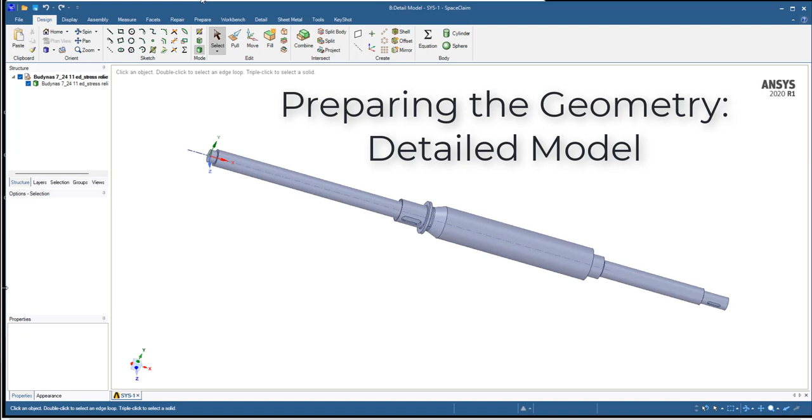In this section, I want to talk about taking our geometry. We've got a detailed model here, and in this case you can see I have implemented two stress relief features, one over here, and then also a smaller one at this step right here.

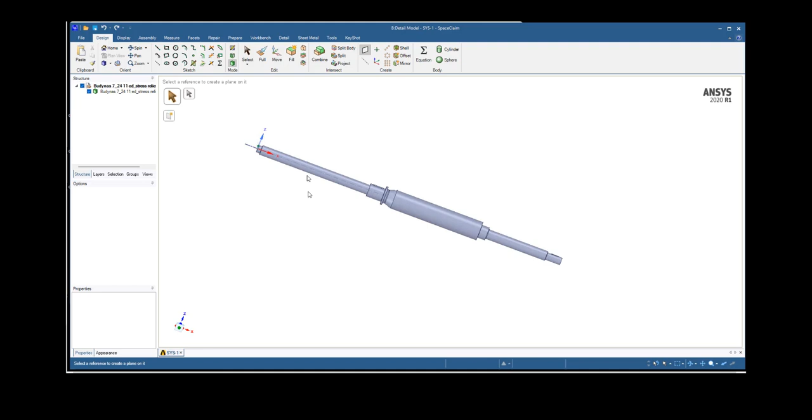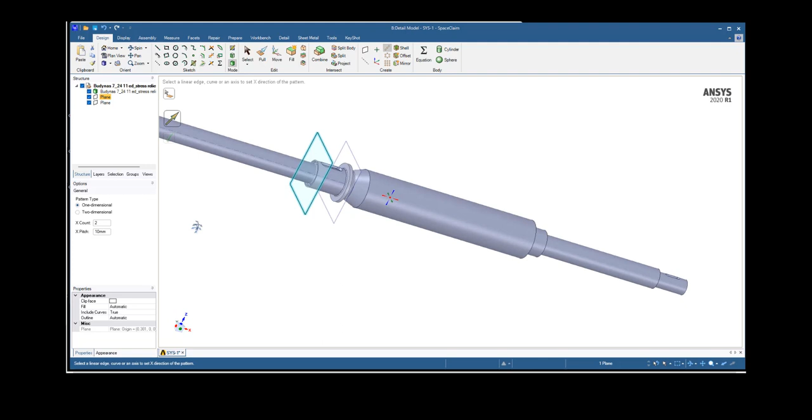I want to simplify and cut away the stuff that I don't need. The approach I'm going to take, you could do a variety of things, is I'm going to put a plane there and also define a plane here. Then I want to offset those, and the easy way I know how to do that is to make a pattern with two elements, move it along that axis, and offset it enough that it's more than a diameter.

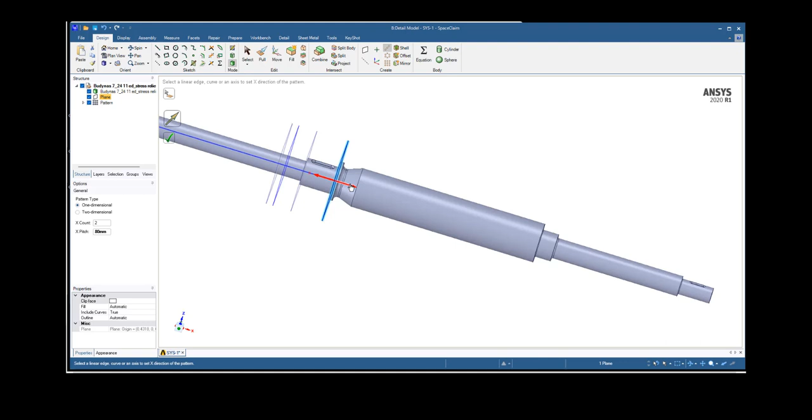Looks good to me, so I'll hit go, and then I can offset my other plane. That's a larger diameter and most of the features behind it, so that's going to take more distance. Let's see if 80 looks right. Oh, I need to select my axis—I want to offset this direction. Yeah, it looks reasonable, so we'll go with that.

So now I've got my solid here. Let's see if we can split the body. We'll select that and split... and that's gone.

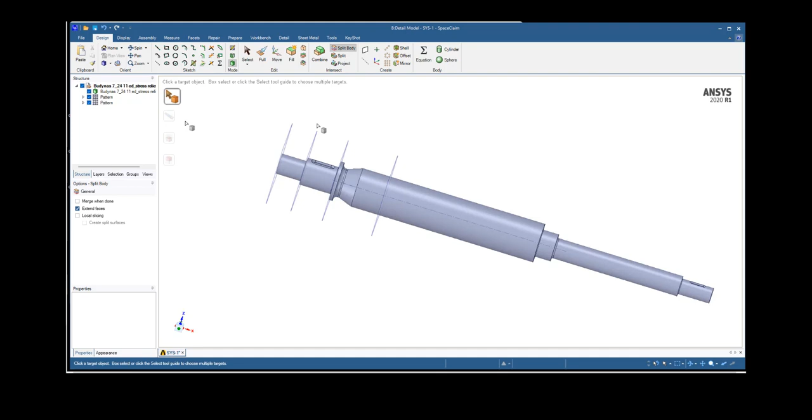So let's pick start over again. Let's pick our body, pick the cutter. And we're going to get rid of this. Okay, what didn't I like about that?

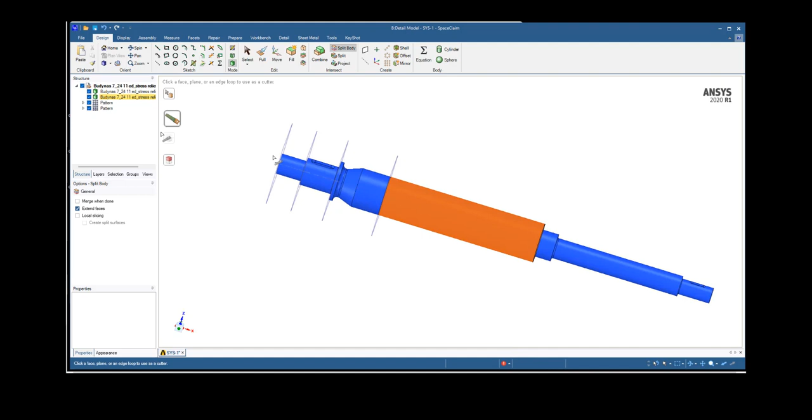Okay, looks like I've already split my body, so I can't split it again. What I can do, and I don't mind keeping that, but what I want to do is suppress it for physics, and I'll also just hide it there. So we have just the part that we need in the model.

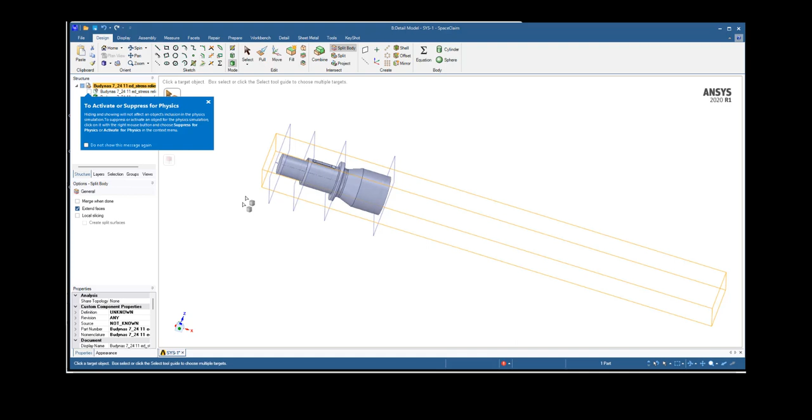Now, in this case, I want to keep all the details in there so that those can all be accounted for.

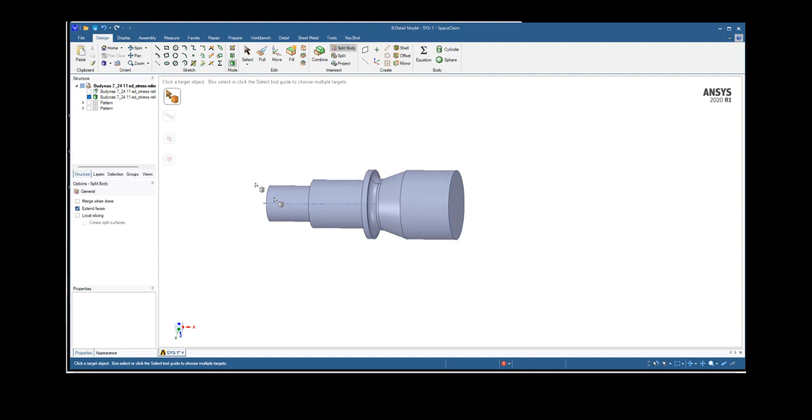Now, an alternative approach, if you're going to try different geometries, in particular, would be to do the splitting, the cutting in SolidWorks, make that a configuration in SolidWorks. You could export that as, for example, a step file, and then import it into SpaceClaim. That way, when you update it, you may be lucky in that all of the references could change the geometry, and with a little luck, you may not have to redefine your model in Workbench.

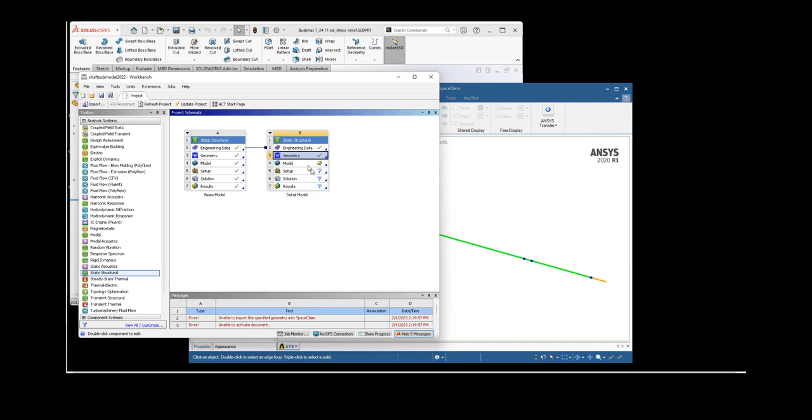So once we have that model, we can come back here. Let's open Ansys Mechanical, where we'll be able to set up the boundary conditions for this model. So now we have the model imported into Ansys Mechanical.

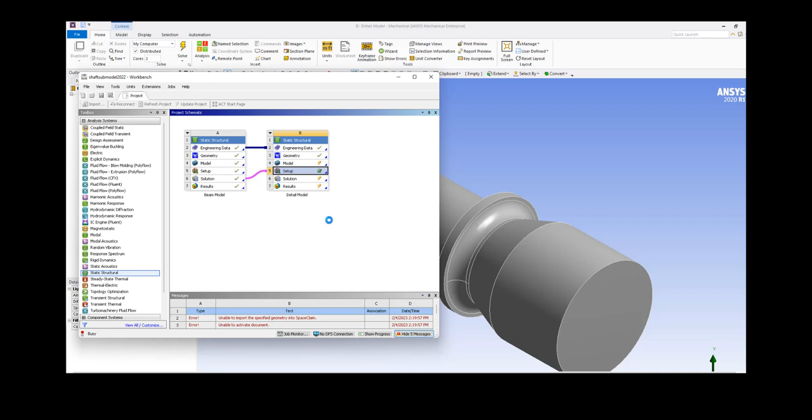In order to do the submodeling, what we're going to need to do is take the solution and wire that to the setup of the new model. I'm going to update the components, and so I can see the question marks—there's some things that I need to address in here. And you notice it creates a submodeling group in there.

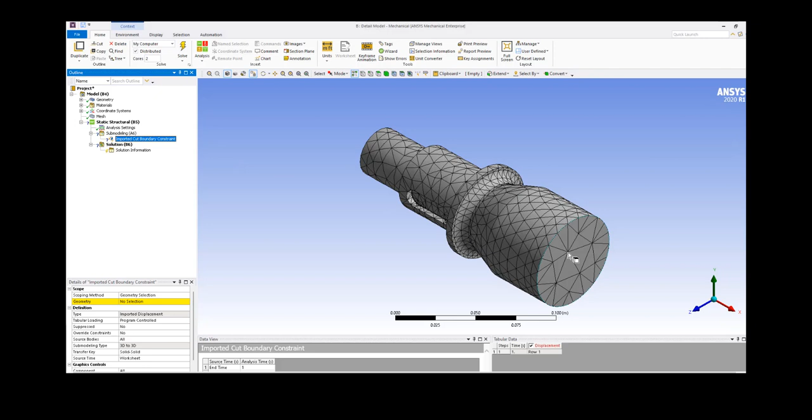So now we want to put our cut boundary constraints. We'll identify our cut boundaries and apply. Let's go ahead and insert another cut boundary, since this one, I didn't select both of them the first time.

So now it's going to find the deflections from the beam model and apply those on this face so that it will have the equivalent stresses. Now I still need to make sure that I have other loads, because we had loads placed in this area of the submodel. I need to go ahead and apply them in here as well.

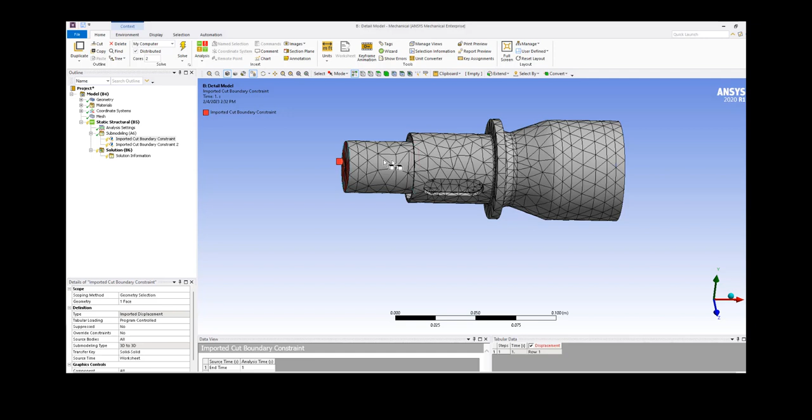So I need to stop the shaft from spinning to resolve the torque, and let's apply. So we'll put some displacement—we'll select the face of the keyway, apply, and then I want to keep it from rotating, so I'm going to just keep it moving normal to the Y direction.

I will note here that I can pull these from, pull out the submodeling results for particular steps in the model, which we can explore a little bit later.

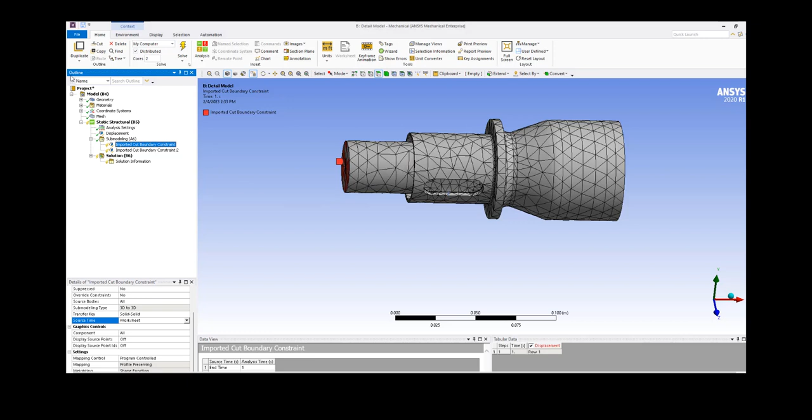If I look back at my beam model, I have forces in the Y direction, and so I need to go apply similar forces on the shaft in my detailed model. So let's switch over to the other mechanical.

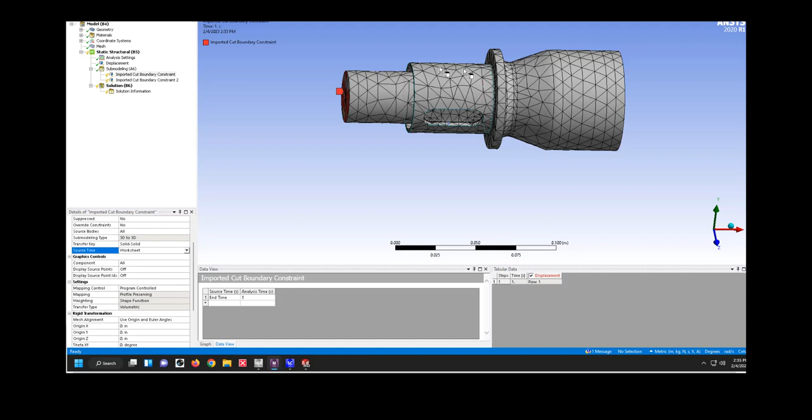And so I need to put a force there. Ideally, I'd probably split this face and apply it on that face, but I'm going to go ahead and apply this to the whole area. So, and I want to do, let's see, we're going to insert the force.

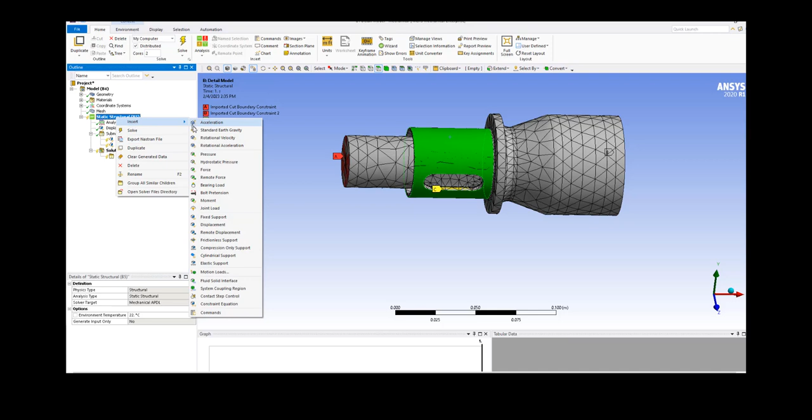And I'm going to do that as a bearing load so that it gets a somewhat more realistic distribution there. We'll define that based on the components, so in the Y direction, and we'd need to match what we did in the other one, but I'm going to say minus 100 newtons here. You could choose appropriate values that you use in your simulation.

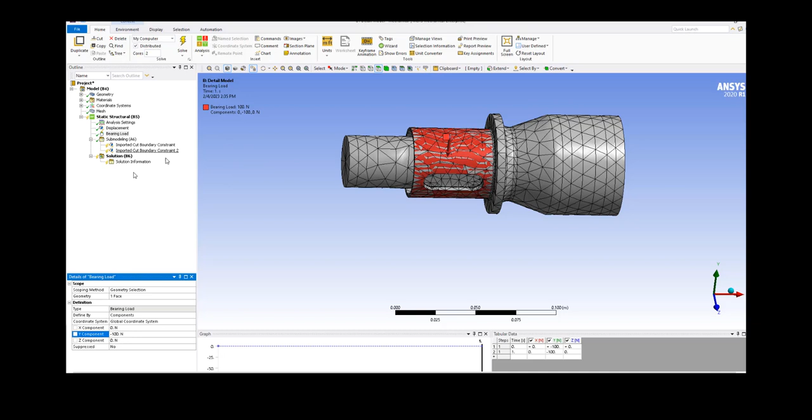With that set, then we can begin to run this. Let's insert a little bit of a couple solutions, and let's see if it works just by hitting a quick solve.

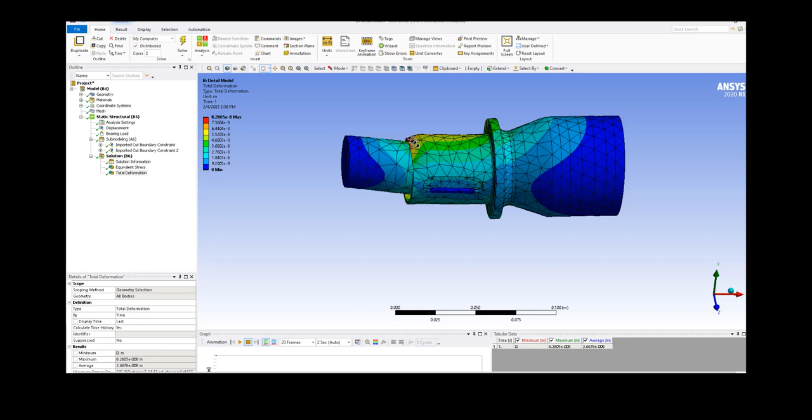Okay, so I solved the load case, and we could see this is distributing pressure across that whole area, which I really wouldn't want to do, and we're giving some unrealistic stresses in that corner that I'd either need to resolve, change the way I'm applying my load, or exclude that from my analysis, because that's not really the case I'm concerned about.

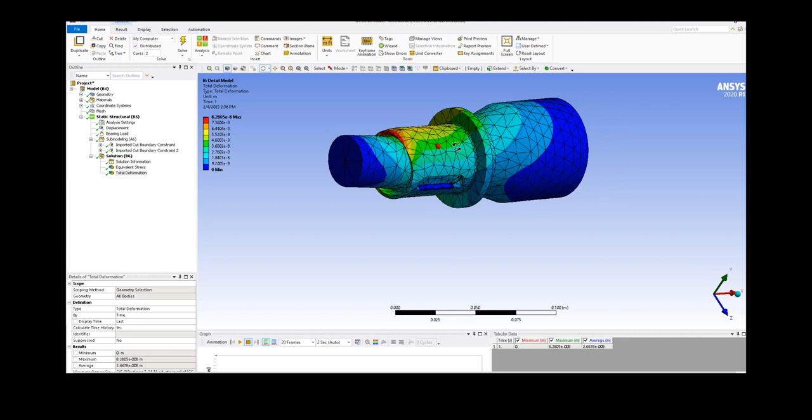And then obviously the other part is this mesh is way too coarse. I mean, the whole idea here is to be able to use a refined mesh. So my next steps would be to come in here and insert some sizing and other mesh controls so that I could get finer features in the regions of interest.

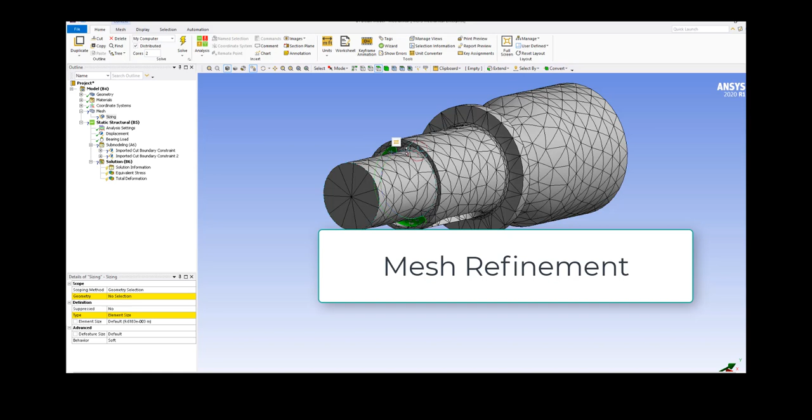One of those is going to be the fillet. It's about 1.5 millimeters. And the other one that I'm going to want to do is this other fillet.

So let's insert a new mesh control. Apply that and start out with 1 millimeter. And we also probably just want to change the overall size of the mesh.

And then I can generate it, and I can progressively refine this as we go. So let's generate the mesh and see how that looks.

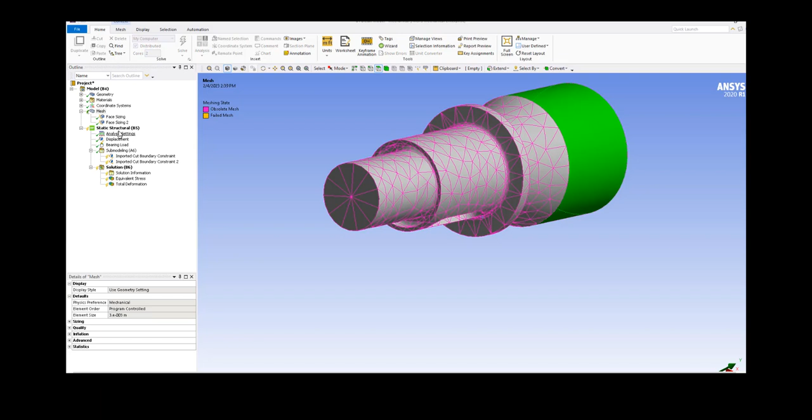So for this case, where I'm showing two different refinement methods or stress relief methods, I went ahead and also added a refinement onto those fillets, and that does a nice job of spreading that out with a fine mesh around that area. Maybe a little extra on the outside here, more than I need, but it's not too bad.

Now with this, having both of these features in the larger meshed area, the model's a little slow. It's going to take a little bit to solve. So I'm going to explore the rest of the stuff without those refinements, which is always good practice when you're setting up your model.

Making sure things are working right, you do a nice coarse model initially so that you see everything makes sense on your boundary conditions, and then you can refine it and collect the data and do your mesh convergence and things you may need to do.

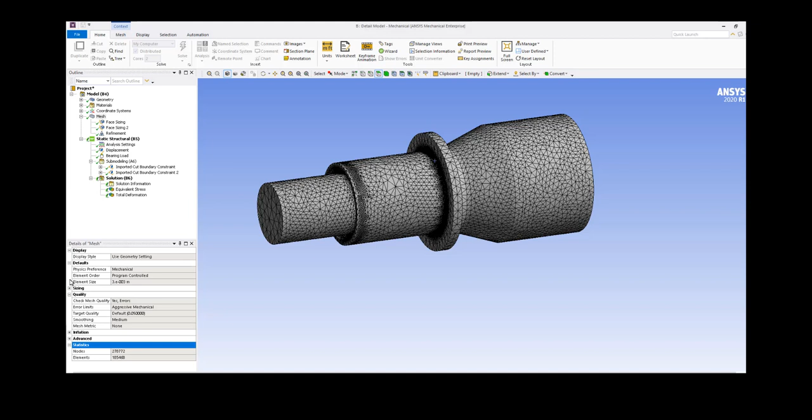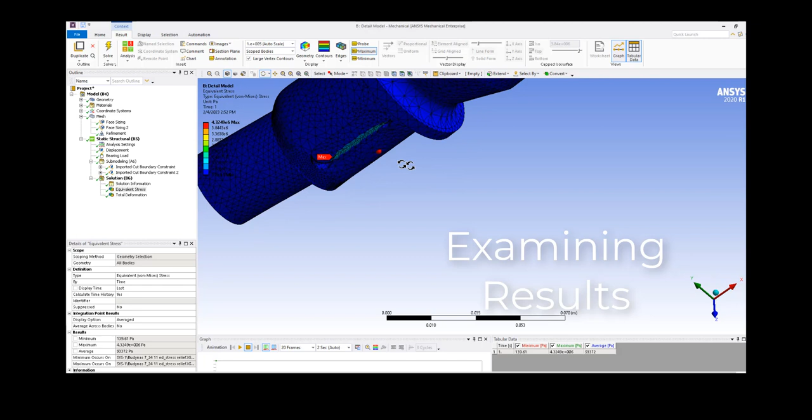We observe when we look at the solved mesh, everything looks blue, and that doesn't seem very realistic. As we look around, we can take advantage of doing the probe for the max. We look around and say, yeah, interestingly, we've got most of the stress right here, which kind of makes sense because I have not put in any fillets, so that's going to be a high stress state, but it's also away from the areas I'm interested in, so I'd like to just ignore that.

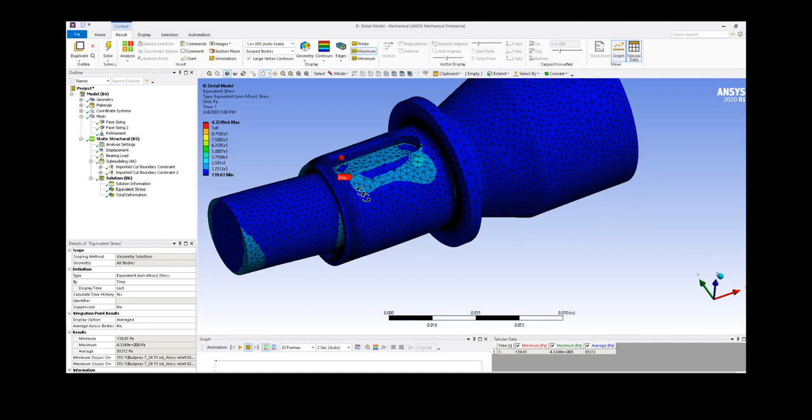So what I'm going to do here is change this cutoff so that we begin to reduce some stress. That's not quite enough, so let me adjust that down further, and now I'm getting a more interesting contour here. I can see the stress.

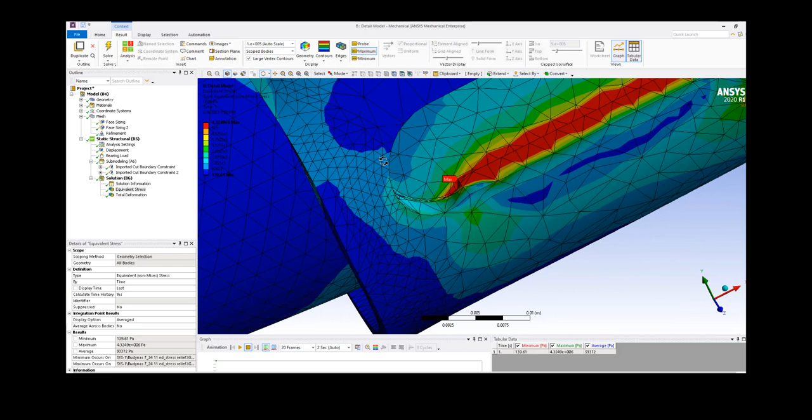Now this deformation on the top, again, for your analysis, if you were to see something like that, I would expect you to split the face so that you could apply the load over a smaller area so it's more realistic. But with this, it's also hard to see.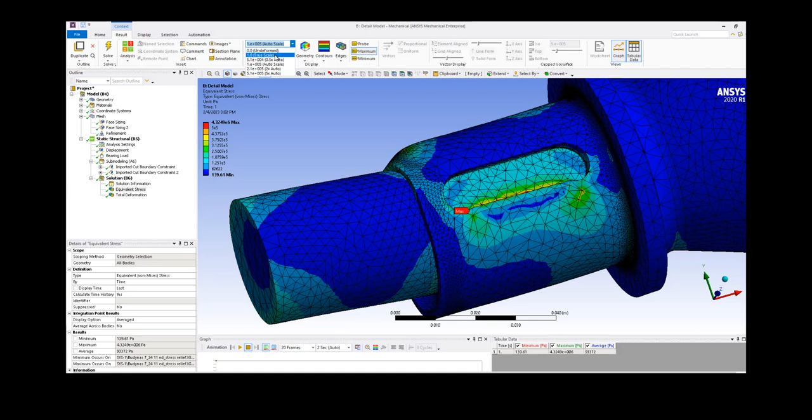So one of the things I may want to do is just do true scale deformations so that I can see what's happening in those particular regions.

Okay, so this shows you the basic process of solving for localized stresses using submodeling. And the key was using the imported cut boundary constraints in order to get the deformations that are applied at the ends of the beam.

Because I applied displacements on these two cut boundaries, the model was fully constrained, and I did not need to apply other displacement constraints in the model, at least in this case.